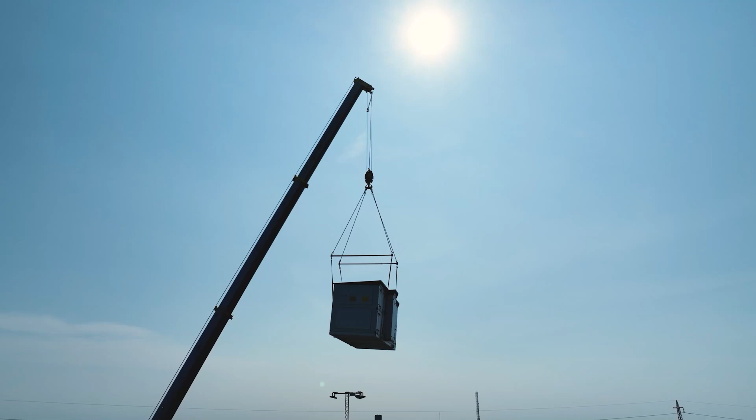An older air handling unit may be in good condition, but replacing it can be surprisingly profitable. Today we will look at how easy it is to calculate energy savings and payback time for the replacement of a unit from the 90s.

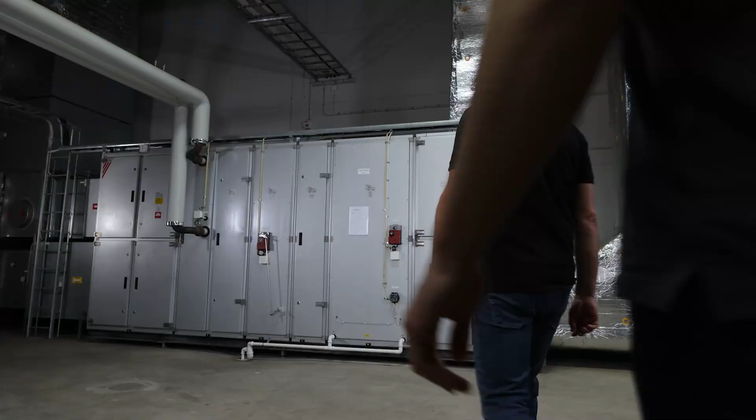We'd like to calculate the energy saving and payback time for replacing this unit. It still looks to be in good condition, but since it's over 20 years old, we know there are way more efficient units today. To be able to calculate this, I need some more information from you. What is the airflow? Well, it's 5.3 meters cube per second. Here we see they're belt-driven fans, and the SFP value at that time used to be around 3.5.

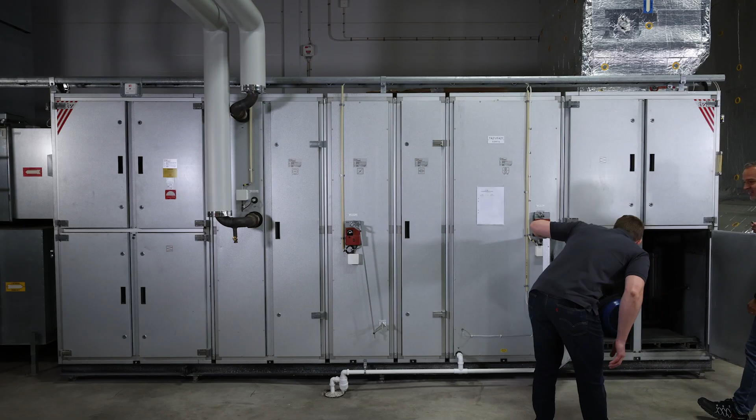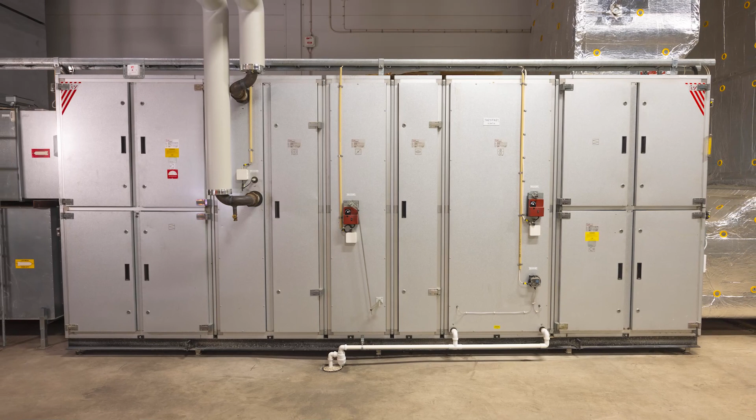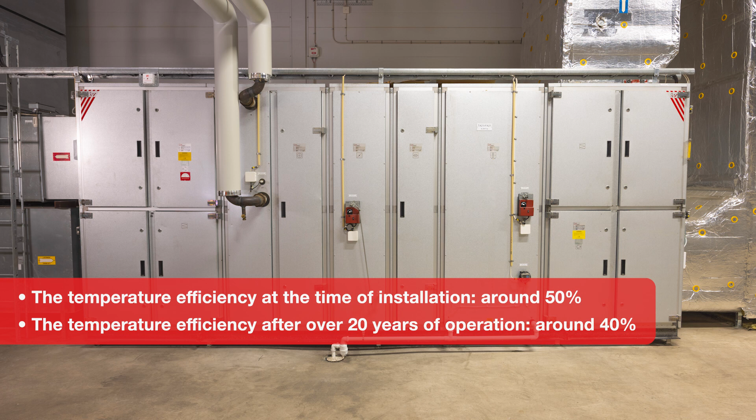We have a heat exchanger with around 40% efficiency. In the 90s, plate heat exchangers or runaround coils were most often used as heat recovery units. At the time of installation, the temperature efficiency was around 50%, and after more than 20 years of operation, it may have been reduced to around 40%. What are the operating hours? It's 3,500 hours per year.

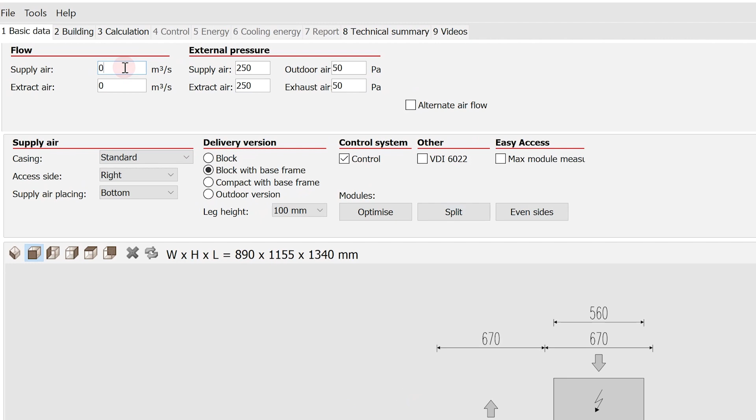Here in IV Produkt Designer, we can calculate the new unit, and we can make an investment calculation that will show the energy saving and the payback for this project. In this project, an Envistar Flex unit is suitable. Like we said, the airflow is 5.3 meters cube per second. Is 250 Pascal on the supply and extract air, and 50 Pascal on the outdoor and the exhaust air, okay? Oh, sure, that's good. Let's move on to the building of the unit.

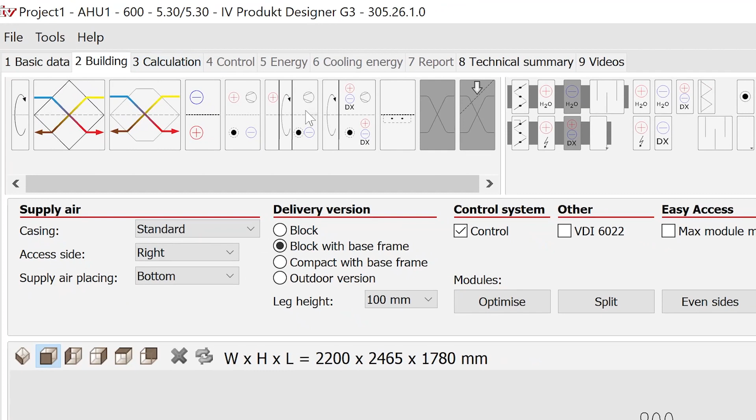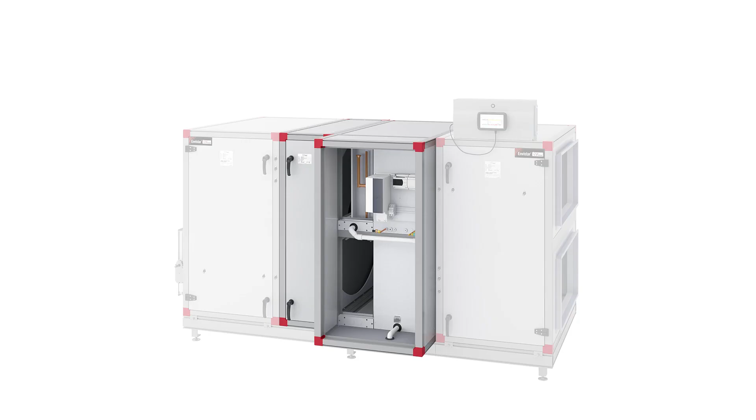We select a rotary heat exchanger, which is the most efficient recovery unit. The cooling unit will also be replaced, and we recommend that we integrate it into the air handling unit. In this case, a Thermocooler HP fits well. The reversible heat pump Thermocooler HP can be integrated into IV Produkt's Envistar Top and Envistar Flex units. It functions as a heat pump in the winter and a cooling unit in the summer. We will select the size that is appropriate for the duty.

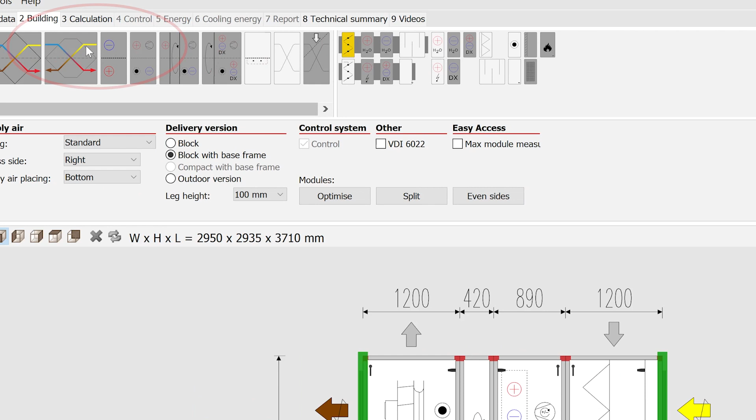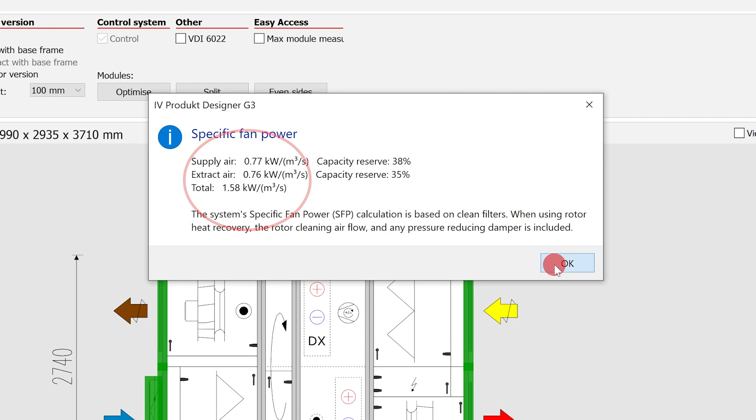We select a rotary heat exchanger with a temperature efficiency of 83%. The SFP value for the fans is 1.58. Okay, the calculation of the unit is ready and standard controls have been selected. We will move on to the Energy tab and select Investment Calculation. Here we enter the yearly average temperature and the air handling unit's running time. What energy price should we fill in for electricity and additional heating? Well, make it 30 pence for electricity and 10 pence for heating.

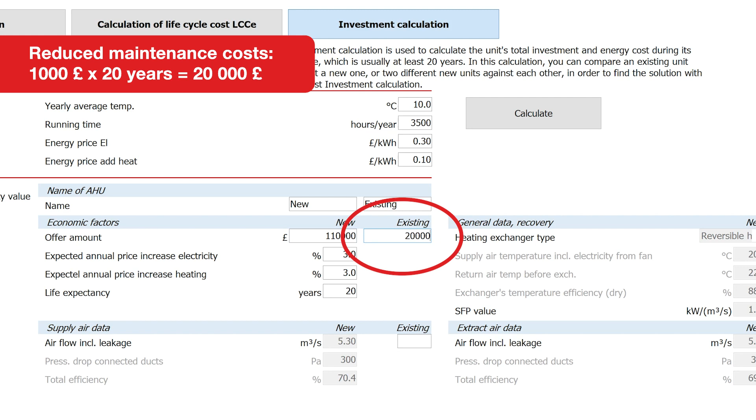The air handling unit costs about £75,000. Could you give me an estimate on the installation cost? I've given it some thought and I would say about £35,000. Let's enter the total here, £110,000. The new unit will reduce maintenance cost. How much do you estimate that we will save? There will be a reduced cost both when it comes to service and repairs. So I would say at least £1,000 a year. The life expectancy is set to 20 years. So we enter £20,000 here. We expect an annual price increase for electricity and heating of 3%.

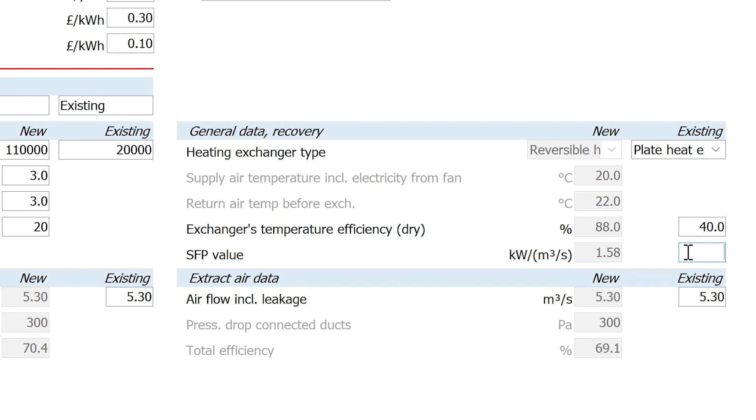Here we enter the airflow for the existing unit. And the efficiency for the existing unit is 40%. For units from the 90s, the SFP value is usually about 3.5. We also take the opportunity to calculate how the property value will be affected. Here, we will fill in the expected return. And if we know the ventilated area, we can enter it here. Now, let's calculate.

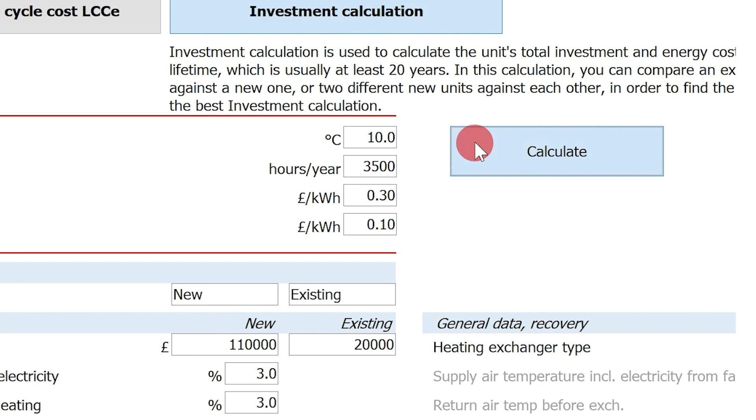Here we can see the temperatures and airflows. The SFP value is reduced from 3.5 to 1.58. The temperature efficiency increases from 40 to 88%. The rotary heat exchanger is at 83%, but together with the heat pump in Thermocooler HP, the total is 88%. The energy use of the fans is reduced from around 65,000 to 29,000 kilowatt hours. Previously, 99,000 kilowatt hours was needed for additional heating. Now, 2,500 kilowatt hours, which we provide the heat pump with, is sufficient.

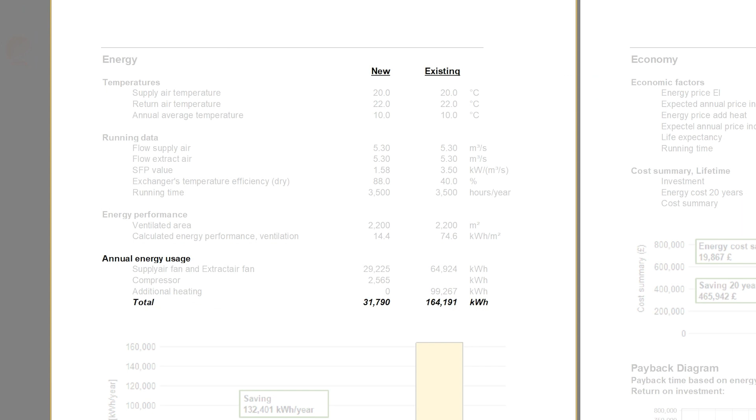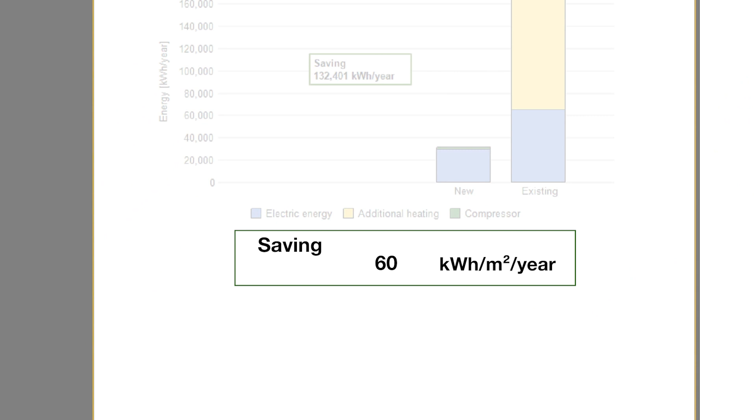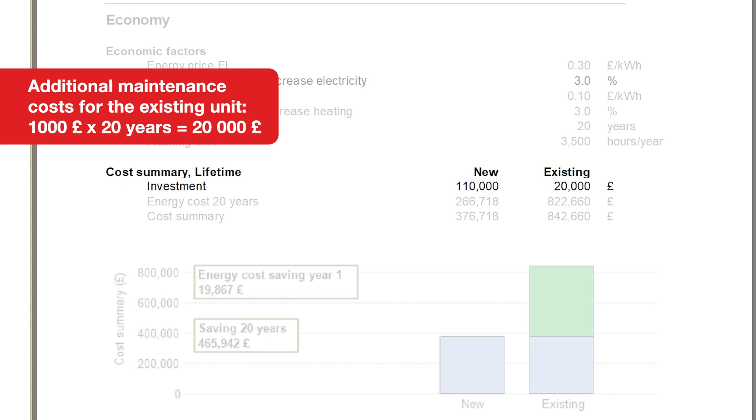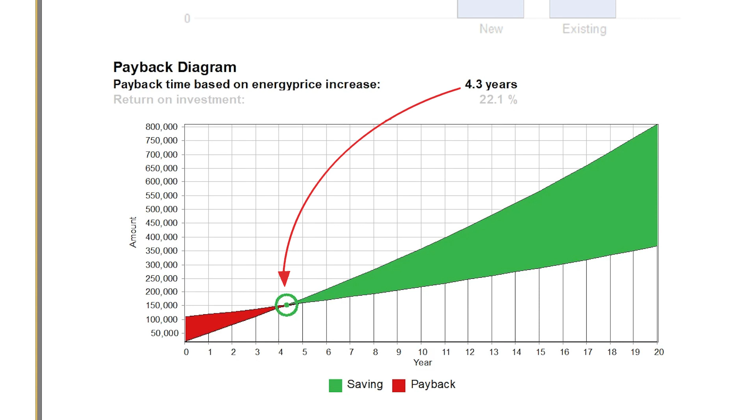In total, we reduce the energy use from 164,000 to 32,000 kilowatt hours, which equals a saving of 132,000 kilowatt hours per year. In this project, this corresponds to 60 kilowatt hours per square meter and year. There will be a big environmental saving, but how about the economic factors? Here we see the energy price and the expected annual increase. The investment was £110,000 and we estimated the maintenance cost to be £20,000 over 20 years. The total saving is £465,000 over 20 years. The payback time is 4.3 years and the return on investment 22%.

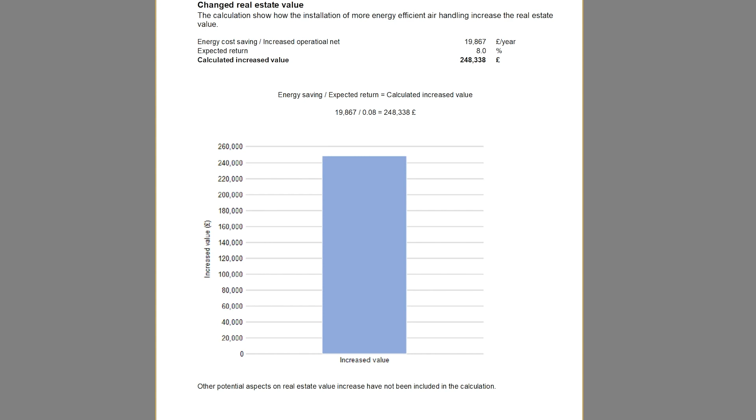Here is the property value calculation. A saving of approximately £20,000 and expected return of 8% result in a property value increase of nearly £250,000.

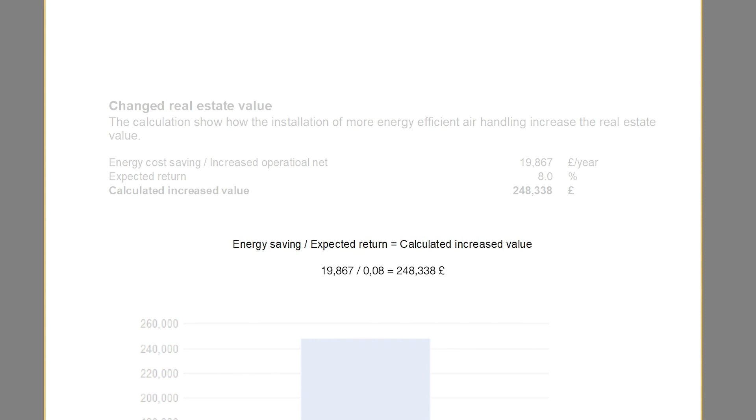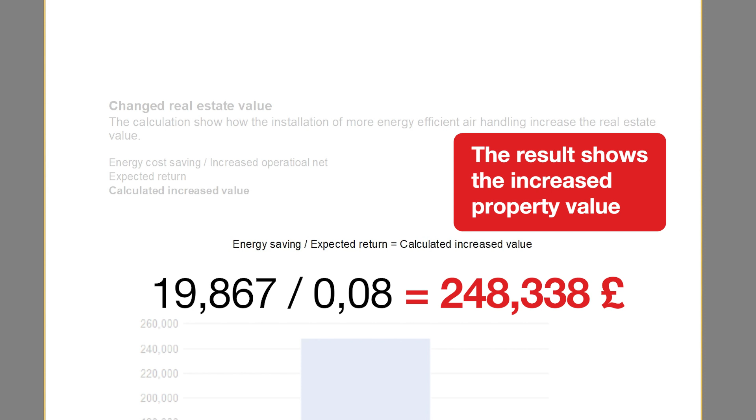I will now make an accurate quote for my customer and attach the investment calculation with energy saving and payback time. That sounds good. As we have shown, it is quick and easy to calculate the energy saving and payback time for replacing an older air handling unit. And many times we see savings this big.